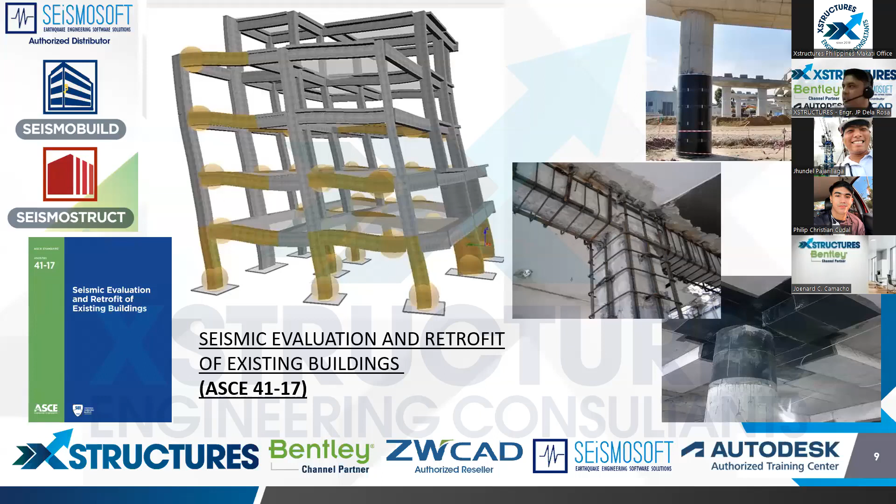So if you need FRP, concrete jacketing, and steel jacketing of elements, you can do it with the program.

When it comes to software solutions, for any industry - buildings, bridges, geotechnical, or rail, power plants, project management - Bentley has all solutions for those different industries. But for us, we are focusing more on structural, roads, bridges, and geotechnical.

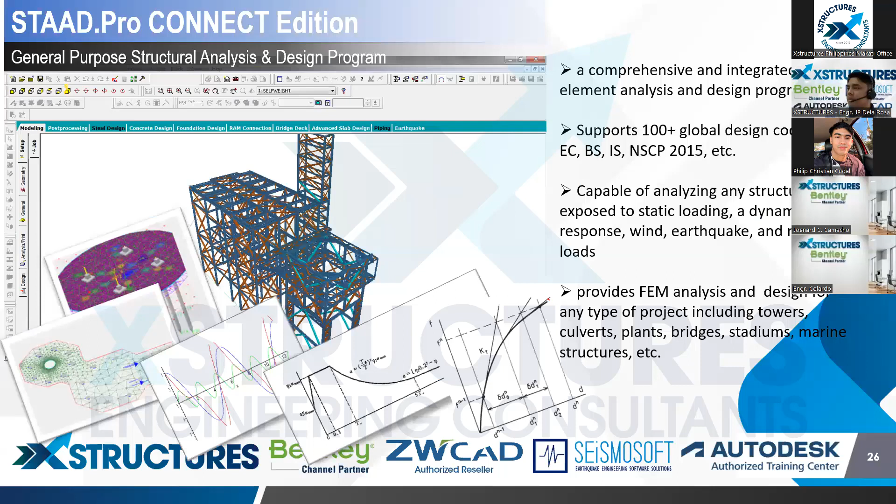So here are some of the projects I compiled that were designed using Staad Pro. Most of these structures are monumental structures abroad. Because I worked in Dubai, UAE for so many years, here are some of the monumental structures there designed using Staad Pro.

The Abu Dhabi airport, in Abu Dhabi, UAE. So Staad Pro is not just for simple residential structures, it can handle monumental structures, like the Abu Dhabi airport, like the Nakheel Mall in Palm Island, Dubai, and then the Mohamed Bin Rashid Library in Dubai, UAE. So there's so many analyses done there, in-place analysis, construction stage analysis, using Staad Pro to analyze this structure.

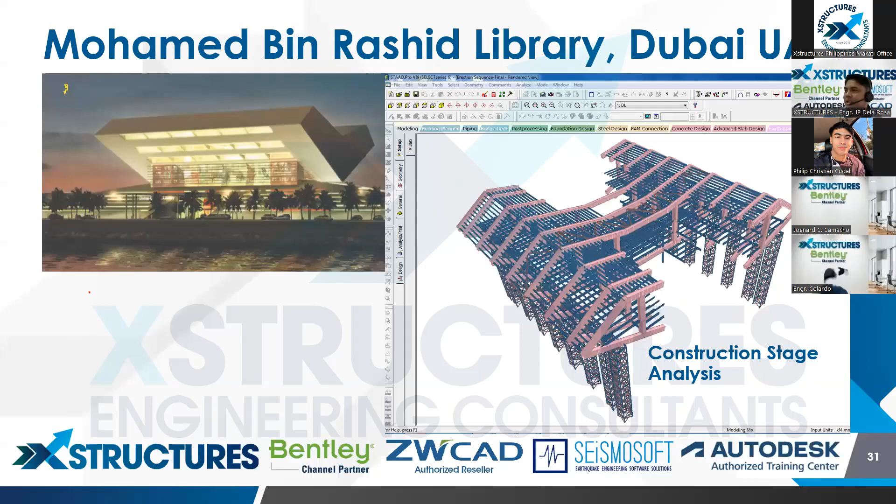As you can see the shape, it's quite unique. Even the Dubai Canal pedestrian bridge, it's twisted, a pedestrian bridge with art. And the Ferrari World Abu Dhabi, combined plate and beam elements, built in Staad Pro and analyzed and designed, of course.

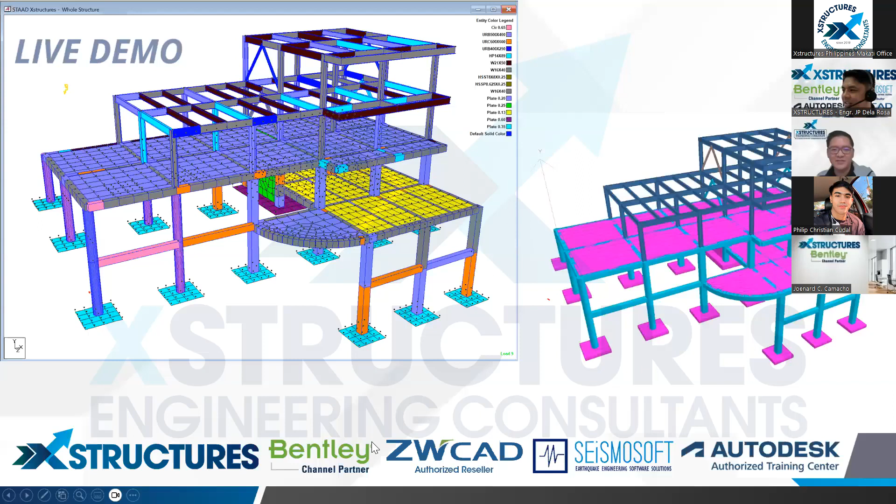Maybe still setting up. Yes sir, hello, good afternoon everyone. Okay. Yes, hello sir. Okay. Sir Paulo is currently in Manila. I'm here in Davao. Okay, because of travel duties. Okay.

I heard Sir JP introduced earlier the software Seismobuild and SeismoStruct, and he told us that currently it's one of the few software in the market to cater to retrofitting design. And this topic this afternoon is very important, because when you do retrofitting design, you need to be knowledgeable about response spectra. And we're going to discuss that.

Okay, so let me now share my screen here. I grabbed our template from Xstructures. Since I'm also currently an assistant professor at TUP Manila, I teach full time in undergraduate, and I also teach in masters. If you ever wanted to enroll at TUP, and even at Xstructures, I'm a resource speaker for some short courses like earthquake engineering, matrix analysis.

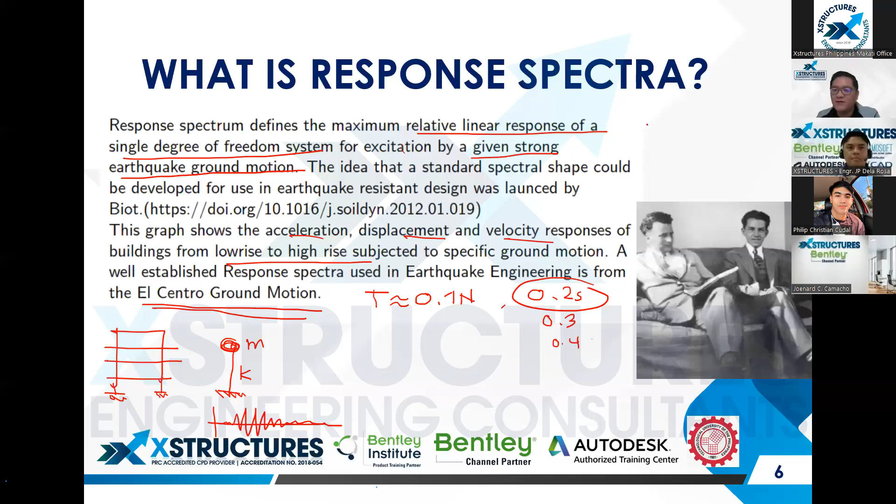Now when it's 0.3, that's a 3-story building. 0.4 is 4-story. 0.5 is 5-story. I believe the designers here, when you have a project and subject it to STAAD or ETABS, you'll see roughly that's how the period comes out. Even if you use the approximate formula from NSCP, CT times H raised to 3/4, you'll get roughly the same period. So when we say 0.5, that's 5-story, and for 10-story, roughly 1 second.

So that means you will subject that ground motion to a lot of SDOFs, from 1-story, 2-story, 3-story, going upward. And then we get the peak responses, as mentioned earlier in the definition.

Okay, so that's for the response spectra from a specific ground motion. When we talk about the code, the code already provides a response spectra, and this is what we will use for design. But before we go into that, let's cover the theory first - we want to create the response spectra from a specific ground motion.

So what's the ground motion? The ground motion representation shall, as a minimum, be one having a 10% probability of being exceeded in 50 years. This is code-based - this is what NSCP states.

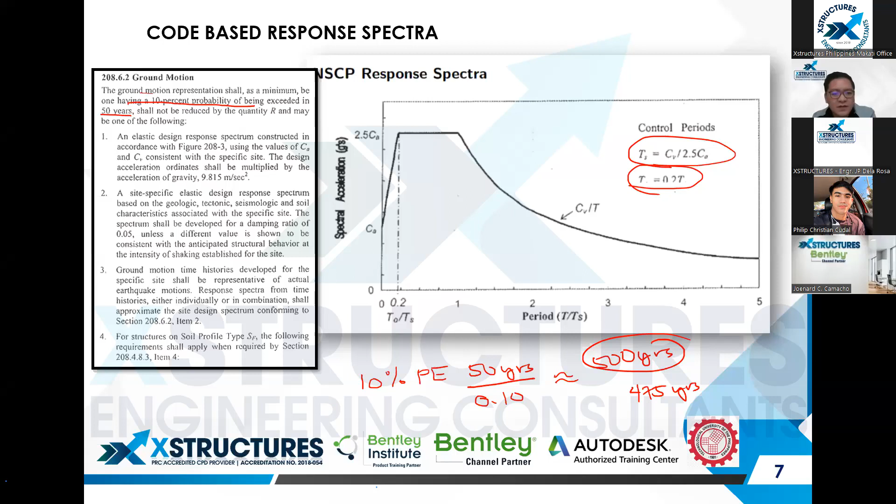So this is a very quick application of it. Once you've generated it, I'll show you a spreadsheet later on how to generate it quickly. Once you've developed it, you import the coordinates into our STAAD, so that STAAD will use it to determine what spectral acceleration to apply.

By the way, this is our zone map in the Philippines—zone 4, and you'll see roughly 90%. So to give context, once you're in zone 4, the code implicitly requires that your structure should withstand a PGA of 0.4 G.

To give you an idea, what is 0.4 G? The Abra earthquake that happened, as per the record of PHIVOLCS, that was only 0.2 G near Ilocos. Of course, we don't have an official epicenter record yet, but what was detected at the PHIVOLCS location was 0.2 G. But imagine the destruction—yet the code requires 0.4 G from us.

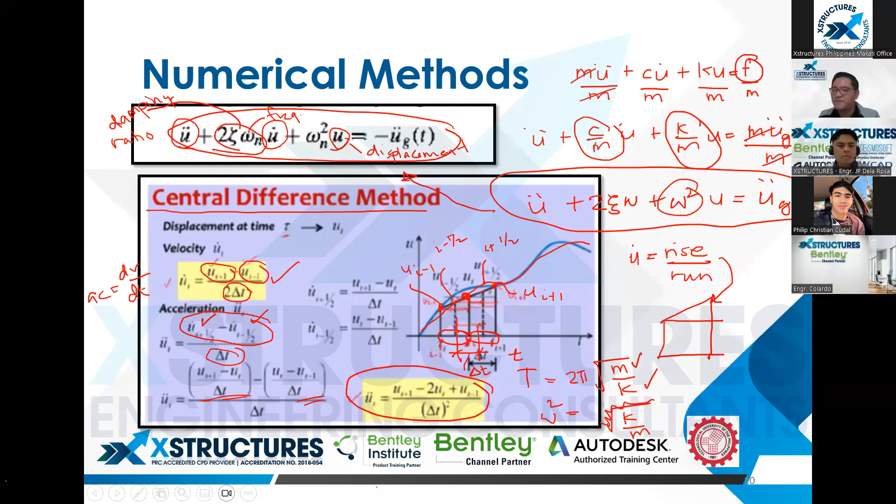Next. So sabi natin, yung formula ng equation of motion is ito: M u double dot plus C u dot plus K u equals force. So nakuha na natin yung formula ng acceleration earlier, diba? So ito yun.

Kuha natin yung formula ng velocity. Plug in natin doon sa formula. Okay, and then algebra lang, find the common terms, until ma-simplify natin into this. And then ito na yung pinaka-algorithm ng central difference method.

I got this from Chopra again. Mukhang madami, no? Pero lagi ko sinasabi sa mga students ko, you will notice itong k hat term, A, B, constants na yan. Constants, because given yung mass. Kasi kapag meron kang SDOF structure, syempre kailangan alam mo yung mass.

Mag-assume tayo ng damping, damping coefficient. Given din yung delta T. Kasi nga, kung meron kang ground motion from PHIVOLCS, normally given na yung time increment, yung records. So ikaw magsiset yan. And also, makikita nyo naman yung formula ng A and B, ganun din, it's a function of M, C, delta T, ganun din yung T. So yung mga yan constant.

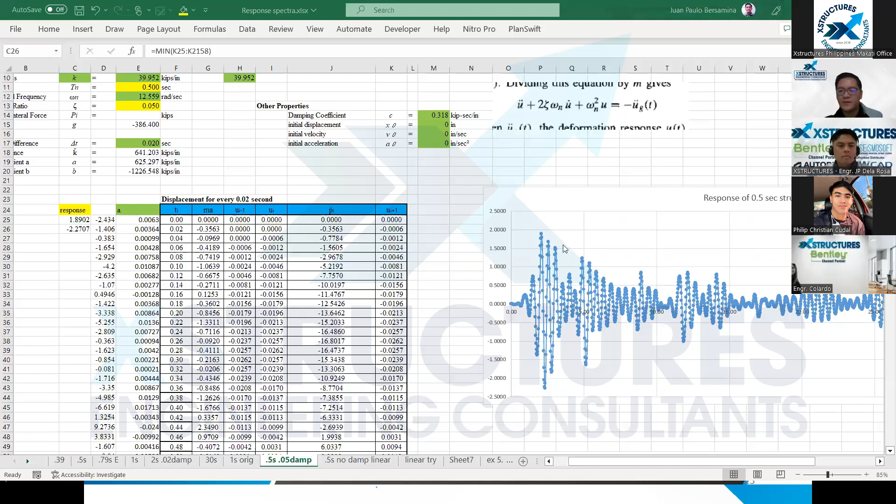Ayan, for example, 5-story. 0.5 seconds period. So if I zoom in here, that's the formula, 2 pi over the frequency.

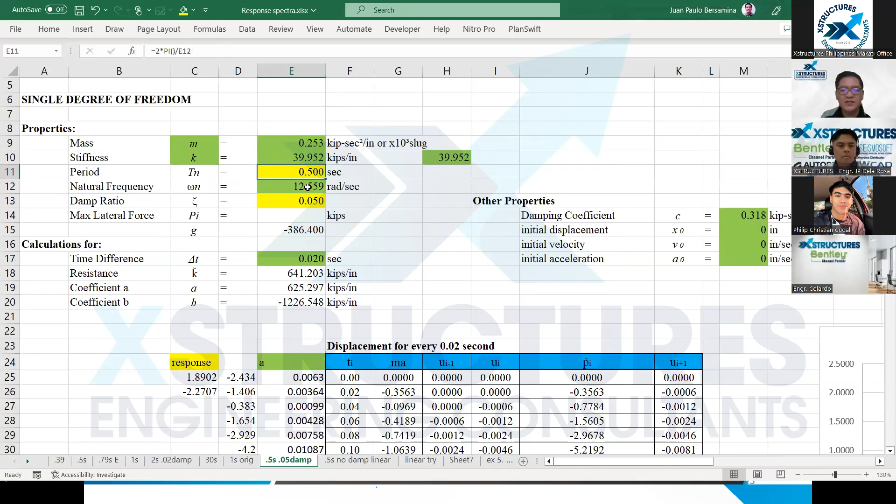Let's say this is your given mass, and this is K, just to get the 0.5 period. This is our El Centro ground motion.

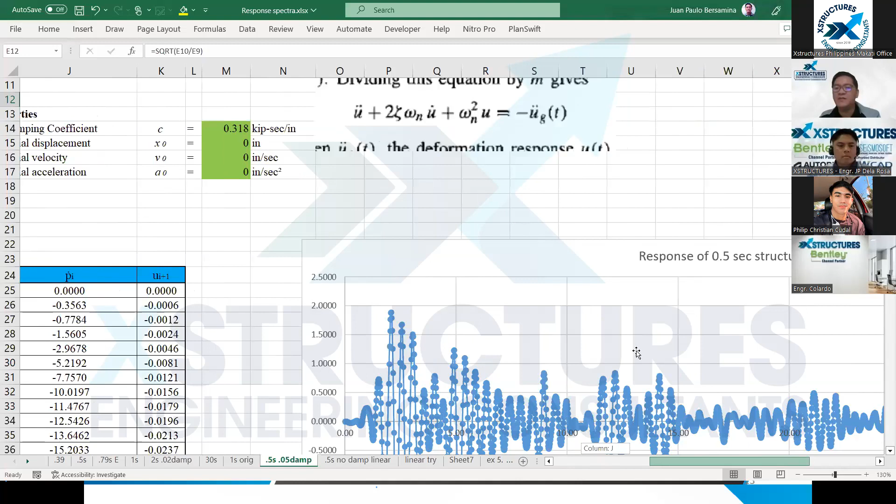We subject it to the El Centro ground motion, and this is its time history response. As you notice, where did the peak response happen? The peak response occurred in the vicinity of 2 seconds, at 1.88 and 2.27 at 2.32 seconds. So it's almost simultaneous with the PGA and the peak response of the 5-story structure with a period of 0.5 seconds.

So let's go back. Sir, we had a hard time with the spreadsheet. You can also do it in Staad. You can do it in Staad also.

For example, you model in this one. We try to model a frame having a period, say 0.5. How do I know that's 0.5? As a basic check.

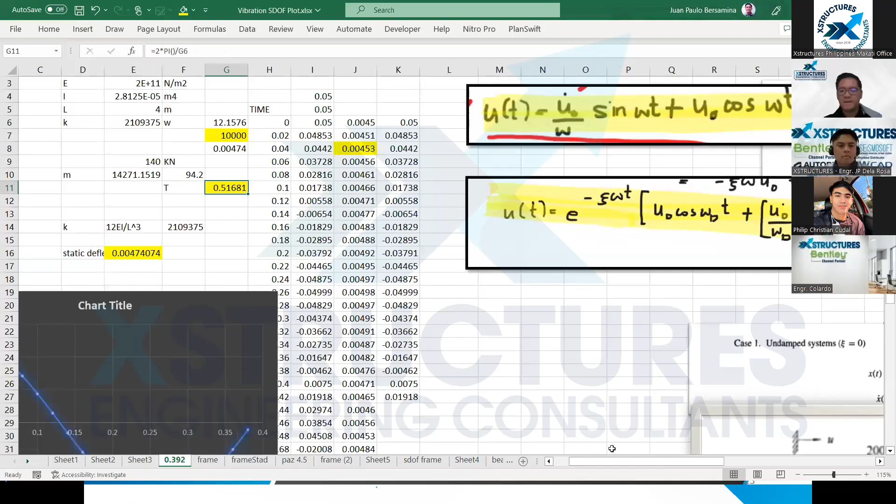Let's say I have a mass, or 140 kilonewton lump mass. Convert it to mass, divide by 9.81, and that's your corresponding mass. Then let's say I have a column that's 150 by 100, for the two posts.

The stiffness of that is 12 EI over L cubed, times 2. So now you have K. You have M, mass, you have K, so you get the frequency. Convert it to period, and this is your corresponding period, which is 0.5. So let's do this in Staad.

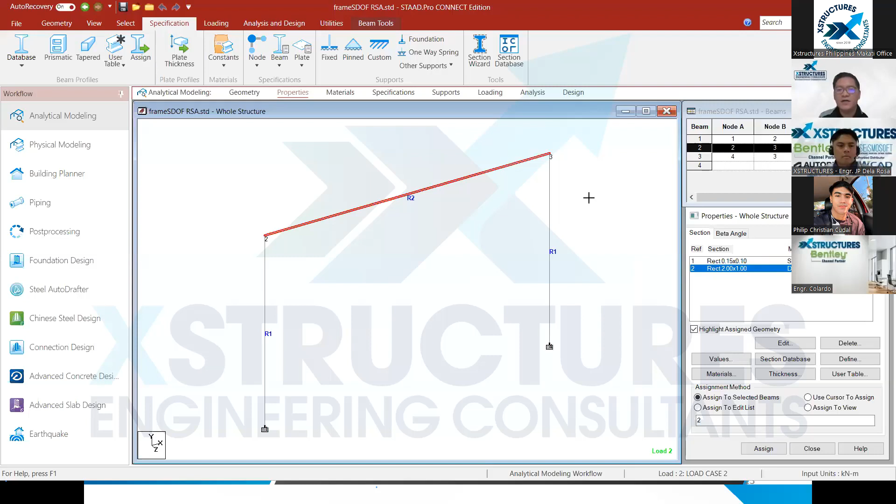Example. Properties, this is our 150 by 100. And then I just put a rigid element to make sure there's no rotation. And then I have a loading. So to have a 140 kilonewton mass, I put 70 on both ends. Then you perform this command, the modal calculation, meaning it computes the period of your model.

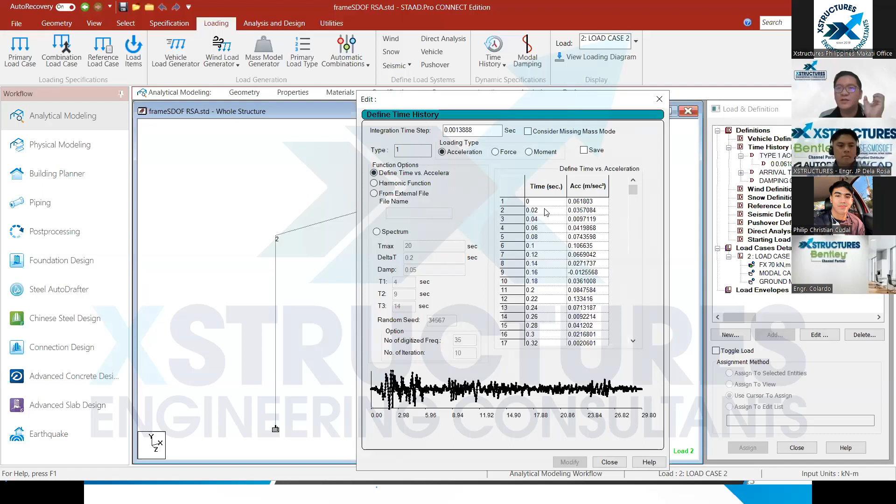So you define time versus acceleration. And what's great about Staad is you can just copy paste from Excel the earthquake data. So I subjected El Centro ground motion to a frame having a period of 0.5 seconds.

Okay, so let's run it. Analysis, run analysis. There, done. Then let's go to post-processing. Dynamics, you see?

The computed period is roughly 0.5, 0.52 seconds, the same. Then if you want to find the time history response...

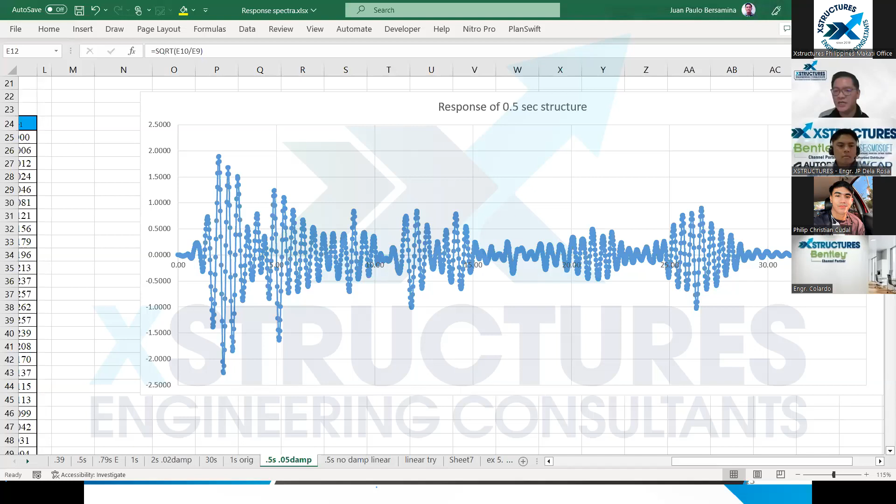Another way to quickly obtain the time history response is we can use the software SeismoSignal. Fortunately for me, as provided by Sir JP of Xstructures, I also have SeismoSignal on my machine. So for example, like we have this, I already set up the El Centro ground motion here.

This is its response spectra. It already has that, but let me just show the time history response. So you can set the damping ratio, you can set the period for whichever you want to find the time history response, and then get the response, which is displacement.

So there, you see, same response, where the peak is roughly at 2 seconds. So let's go back to this. That's the quick procedure using SeismoSignal.

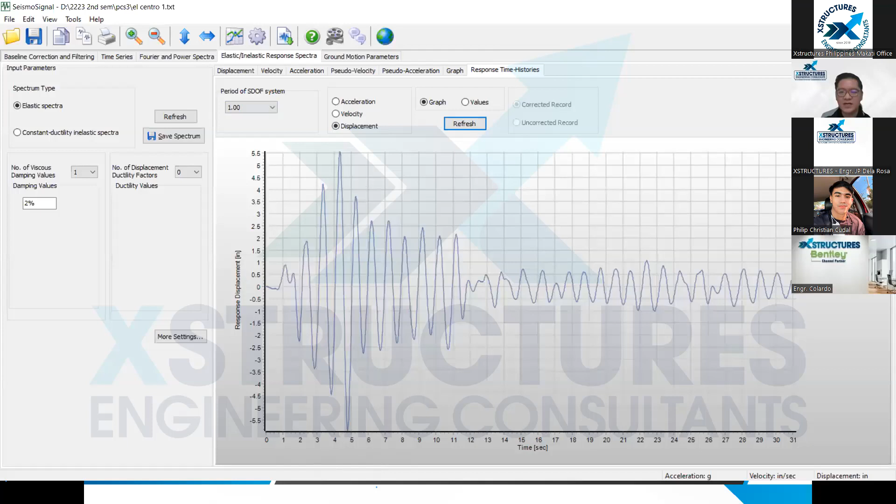How about sa 1 second or 10-story? Balik tayo sa SeismoSignal. Palitan ko ito ng 1 second. Refresh. Ito yung kanyang peak response, that's roughly 5 point, this is 5.5, almost 6, 6 inch. Ano yung nakuha dito sa ating slide? 6 inch. Okay, so the same.

And then for 2 seconds, that's about 20-story, no? 7.47 inch. Balik tayo sa SeismoSignal. 2 story, 2 seconds, 20-story rather. 2 seconds, then refresh, yan naman yung kanyang peak response. Makita nyo, ano niya, that's about 7 inch, ito 7.5. So halos the same. 7.47 inch. Okay, so yun.

You can use Staad, you can use numerical methods in the spreadsheet, and you can use SeismoSignal. And mapaplot nyo na yung displacement response spectra. Mapapansin nyo roughly yung trend pataas. Habang tumataas yung building, tumataas din yung displacement.

And then, to get the velocity and acceleration response spectra, ang gagawin nyo lang naman, di ba, ito nga yung displacement natin. Ang formula lang naman doon is V is equal to omega D, multiply mo lang yung displacement sa frequency. And then to get the acceleration, omega square D. Okay, and yun nga, when you do that, ito yung lalabas na acceleration response spectra.

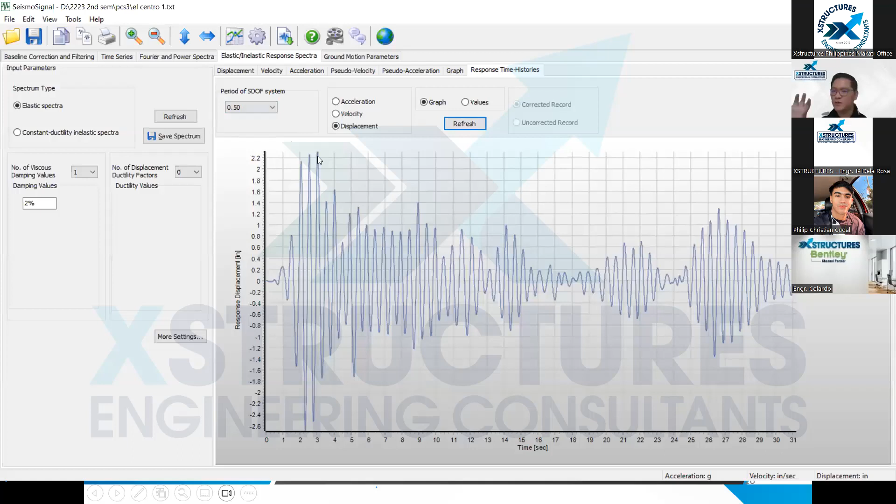Yung 1 second, sinin niyo, refresh, saan yan? At about almost 5 seconds.

Okay, then yung 2 seconds, so yung 20-story, refresh, lumayo, no? So roughly 11 or 12 seconds. Okay, so ano yung sabihin nun? Balik tayo dito, so ibig sabihin, habang yung structure natin tumataas yung period, nagkakaroon ng lag from the PGA up to dun sa peak displacement niya. So itong 5-story building natin halos sumasabay dun sa PGA ng ating El Centro ground motion. Tapos yung 20-story building, na-experience niya yung peak displacement 10 seconds pa, about 8 seconds after nung PGA.

So that's one of the reasons to discuss this response spectra. Mapapansin nyo yung mga low period structure natin, let's say ito 0.5, tingnan nyo yung acceleration niya, umabot ng 1.1 G. Imagine nyo gaano kataas yun, 1.1 G. Okay, while yung 20-story building, 0.2 G lang. You can imagine, no? Yan. So ibig sabihin yung mga low-rise building, ang tendency, makaka-experience sila ng peak acceleration. Tapos yung mga high-rise building, ito, low acceleration siya.

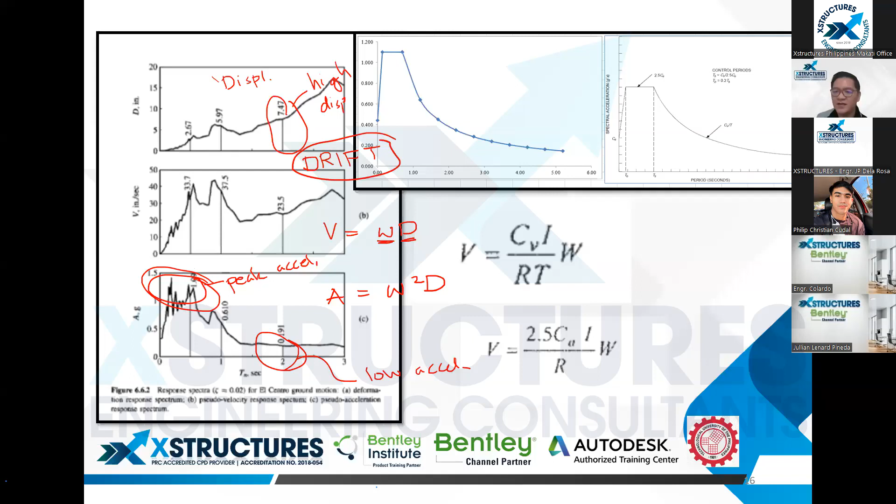Okay, and when you look at the displacement response spectra, of course, yung mga high-rise building, or mid-rise to high-rise, syempre, high displacement. So parang, can imagine, ang bagal sa taas, pero ang laki ng displacement. That's why, yung mga mid-rise to high-rise natin, ang tendency, babantayan mo sila yung design sa drift, kasi nga ang laki ng displacement. Okay, while yung mga low-rise building, ang laki nung kanilang peak acceleration. Halos sumasabay sila dun sa high frequency ground motion, yung mismong PGA, okay?

And that's why meron ditong picture also ng ating code-based response spectra. Kita niyo, no? Ito yung basically, if you smoothen this response spectra, ganyan siya, kagaya ng response spectra natin, ng code-based response spectra natin. Okay, and then...

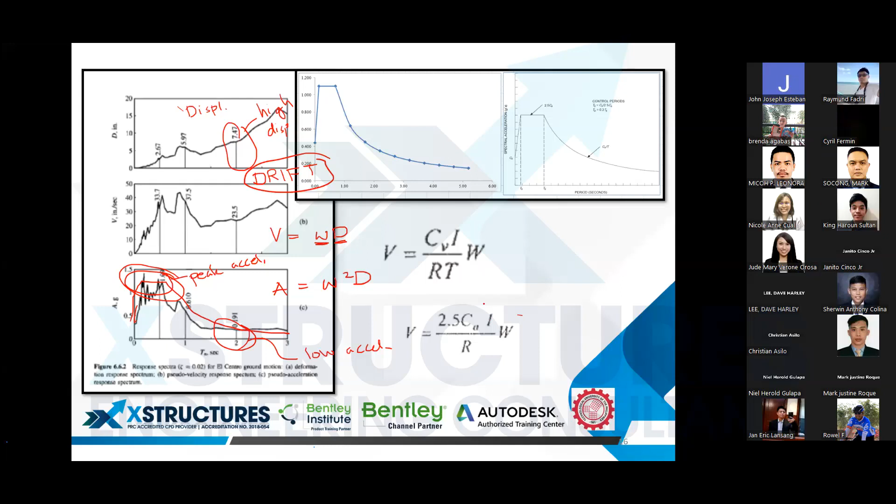So another rule of thumb, another approximation, that's why when you're designing a low-rise building, most likely that the governing base shear formula is this. This is your Vmax, kasi makita nyo sa formula, this is yung peak. Kasi yung mga low-rise building have a tendency na mag-resonate dun sa high frequency vibration. Okay, then yung mga high-rise building, ang tendency, dito sila mag-govern. So, itong area na to for low-rise building, while this one for mid-rise to high-rise. So papansin niyo, pag 2-story, 3-story, madalas ito mag-govern.

Okay, so this is a, ayun nga, a sample code-based response spectra. So input nyo lang kung anong zone ka, ano yung distance mo from the fault line, ano yung soil type ng site mo, and then mag-generate yung Na and Nv, and so the Ca, Cv, so makakakuha ka na ng response spectra like this. Okay, and what do you notice? Tingnan nyo yung coordinates ng response spectra na to.

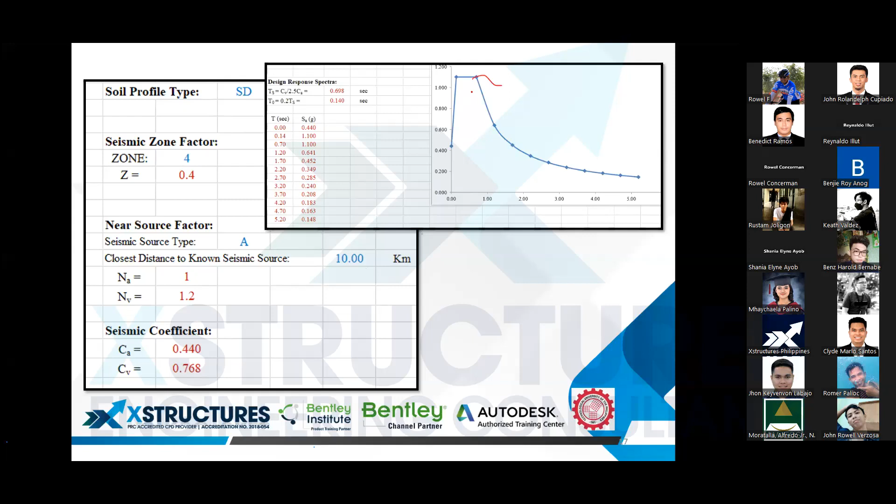And this is also about 1.1 G. Okay? Diba, halos the same nung ginawa natin sa El Centro. Kasi yung El Centro, 0.3 G na eh, halos 0.4 na rin yun. Eh, no? And by the way, I'll show you ito. Yeah, so SeismoSignal.

Saan ba yan... acceleration. So ngayon, graph. Ito to. Period versus acceleration. Ayan na lang. Halos, yan. Ganyan na. 1.1.

Ito yung maganda sa software na to. Automatic, mag-import ka lang ng ground motion, automatic mag-generate na niya yung response. Pero syempre, sa mga students ko sa masters, pinapagawan ko sila ng spreadsheet para alam natin ano yung algorithm ng mga software na to.

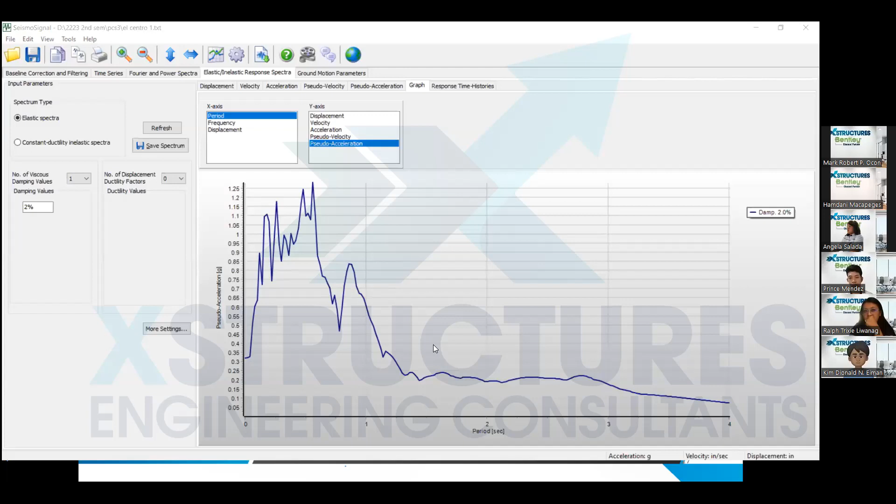Okay, so it's your response spectra. And that's 1.1G. That's too large. Ang ginagawa natin sa code is balikan natin itong formula na to. So makikita nyo, this is 2.5 CA.

1.1G. Now remember, your V is, let's say stick tayo dun sa 2.5 CA W over R. Yan, so this 2.5 CA, ito siya. Okay, but syempre yung gagamitin natin sa design is less than that. And nangyari yon because nag-incorporate tayo ng R value.

If you convert that, roughly hanggang dito lang yan. Sabi natin hanggang dito na siguro. Ibig sabihin, yung magnitude na to, yung reduction na yan is due to the R value. Doon papasok yung R equals 8.5 for SMRF under zone 4.

Yeah, so another reason bakit kailangan natin maging knowledgeable sa response spectrum or the spectral acceleration na tinatawag is because nag-release na, for example, si PHIVOLCS ng SAMPH, or the Spectral Acceleration Map of the Philippines. And this, if you now know how to generate a response spectra by use of numerical methods, or SeismoSignal,

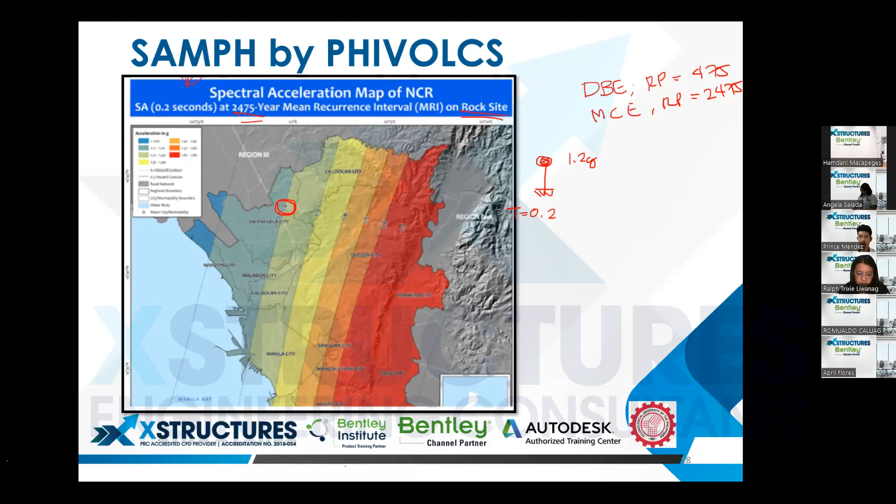Well, it's not official yet, but once na may ganito kang data, spectral acceleration mo, pwede ka nang mag-employ ng IBC format na base shear. Okay, so you also need the spectral acceleration ng 1 second. Naalala nyo kanina, sa 0.5 seconds or 5-story, ano yung spectral acceleration sa El Centro?

1.1G. Yeah? So ito naman, 1 second. Ano yung spectral acceleration? Sa MCE level, Valenzuela, roughly 0.5. Sabihin, 10-story, siyempre mas mababa na yung kanyang spectral acceleration kasi mas flexible na siya. Okay, so 0.5G na lang siya. And that's why meron akong snippet dito ng IBC format, kasi in case lang naman na we transition to IBC, yun yung input natin. I-input niyan yung 1.2, saka yun nga, yung 0.5G na spectral acceleration.

Yan, and then pag na-input mo na yun, SS, yun nga, 1.2, tapos S1 na 0.5. Next na kukunin mo is yung FA at FV. So kung nasa soil type D ka, or site class D, your FA is 1 and FV is 1.5. Okay, well pakita ko lang saglit.

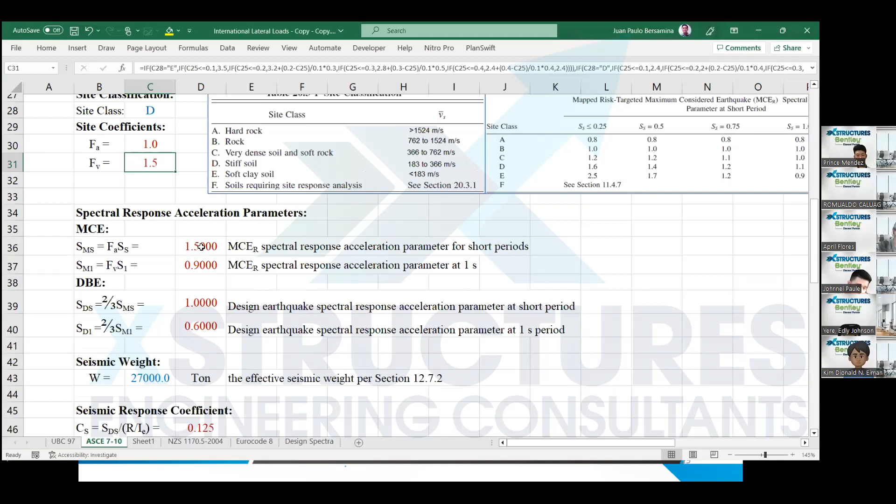Okay, and ito na yung result. Yan, so you will see na amplify siya, naging 1.5 and 0.9. Ulitin ko, 1.2, 0.5 for example, amplify siya, 1.22, and then yung 0.5 naging 0.75G.

Okay, now however, MCE level yan. Di ba nga, sabi natin kanina, yung return period na ide-design natin, about 500 years. Eh yung pre-provide ng SAM-PH, 2500. So, convert natin yon into DBE level. Ito na siya.

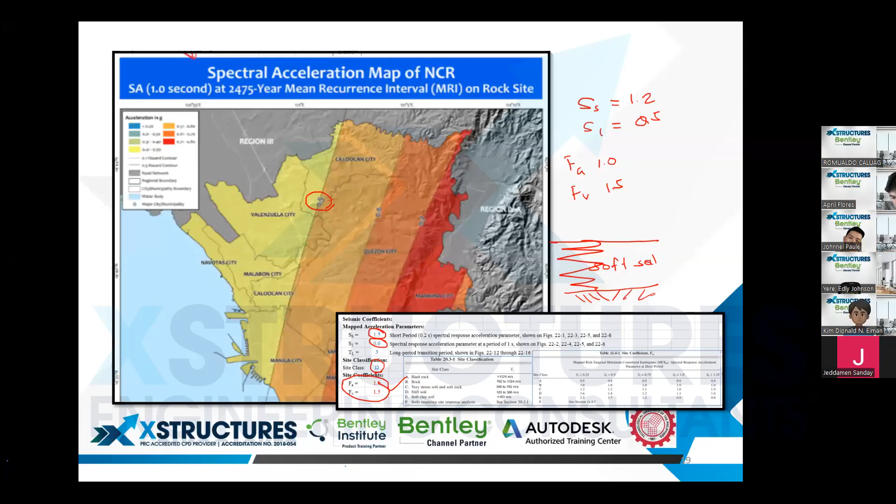So, it became 0.81, 0.5, using this formula. It's only 2/3, the multiplier is just 2/3. So that's it, basically that's what we'll take. That's the use of spectral acceleration in the IBC format. You need to be aware of the spectral acceleration, okay?

So next, let's go into detail on response spectrum analysis. What's the meaning of response spectrum? The ground motion representation should be in accordance with Section 208.5.

And it's mentioned here, the number of modes. Usually when we do response spectrum, it's multi-degree of freedom, right? Not single degree of freedom buildings. So what does it say about the number of modes? It may be satisfied by demonstrating that the modes considered account for at least 90% of the participating mass of the structure. This means we need to get the modal period, the modal mass, and the participating factor.

Okay, so let's just go through the mathematics. As a demonstration, let's say we have a 5-story building here, just a plain frame model, just to show.

From the equation of motion, MU double dot plus KU equals 0. So this is a free vibration MDOF equation. We can convert this formula into K minus omega squared M. This is an eigenvalue problem.

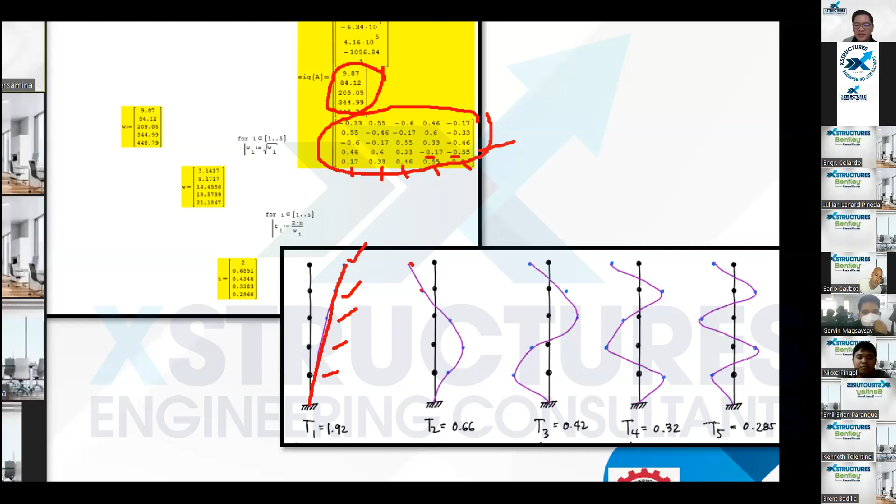For mode 2, this is the eigenvector: negative 0.55, negative on the left side; negative 0.17 still on the left side; 0.33 on the right side; 0.6 on the right side; 0.46 on the right side, and connect the dots, that's your mode 2.

And then mode 3: negative 0.46, positive 0.33, 0.55, negative 0.17, negative 0.6. Connect the dots, that's your mode 3. And the corresponding periods are: 2 seconds, 0.68, 0.43, 0.32, 0.285.

So like I showed earlier with the single story frame, for the loading you will put masses. For example, 444 kilonewtons per floor for your mass. Then you excite it in the x direction, since our vibration is lateral, in the x direction.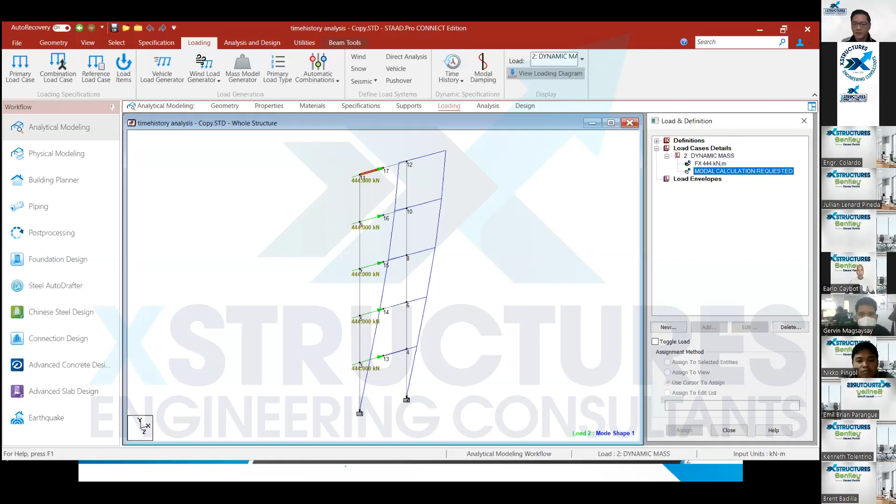Then you use this command, modal calculation, and then run it. And then when you run it, post-processing, dynamics, and this is the corresponding period. You have mode 1, 2 seconds.

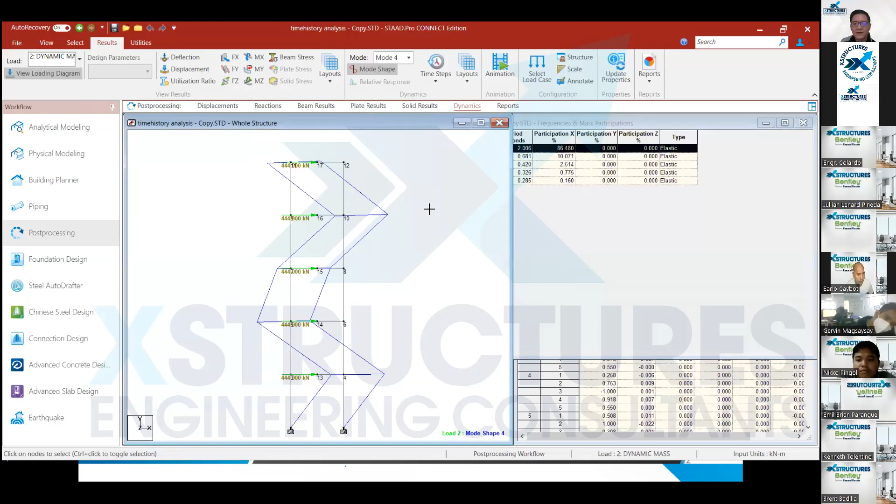2 seconds, this is the shape of mode 1. And mode 2 results, so mode 2, like that. And this is mode 3, mode 3, and then mode 4, and mode 5.

Next, just this. So let's say we already know the mode and mode shape. Generally, when the stiffness is given and the mass is given, when you know the mass and stiffness of your building, you can get the frequency and the corresponding mode shape.

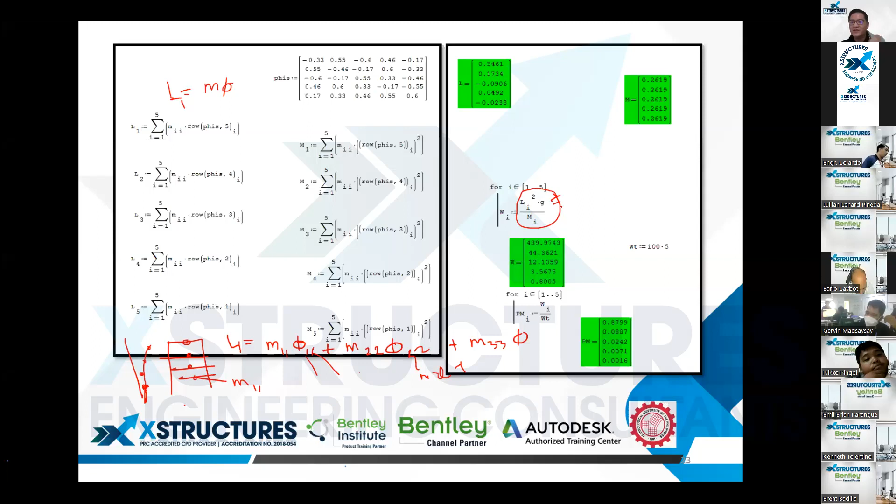Pag nakuha mo na yung L and M, next is you need to find the modal weight. Ito naman yung formula. Kita nyo, L square over M. Itong G naman, constant yan. English units, 386.4. Kung SI ka, 9.81. So yan, makukuha mo na yung modal weight.

Basically, divide mo lang the modal weight by the total weight. Kaya papansin nyo, ibig sabihin, si mode 1, 440 kips yung na-occupy niya. Eh, yung total weight natin is 500 kips. So, 440 divided by 500, you will get 88%.

Si mode 2, na-occupy niya is 44 kips, and then divide by the total weight, 500, so that's roughly 9%. So this shows that si mode 1 has the most significant contribution. Yung mass participation niya is 88%.

Ito yung concept sa static analysis. Yung mga low-rise building natin, nakita nyo yung definition kanina, inaalaw ang static analysis because the mode 1 generally prevails, is dominant for low-rise building. Yeah, ibang storya na pag high-rise na. Habang tumataas yan, itong higher modes, shoot up na yung value niyan. Kasi nga, nagiging flexible na yung structure mo.

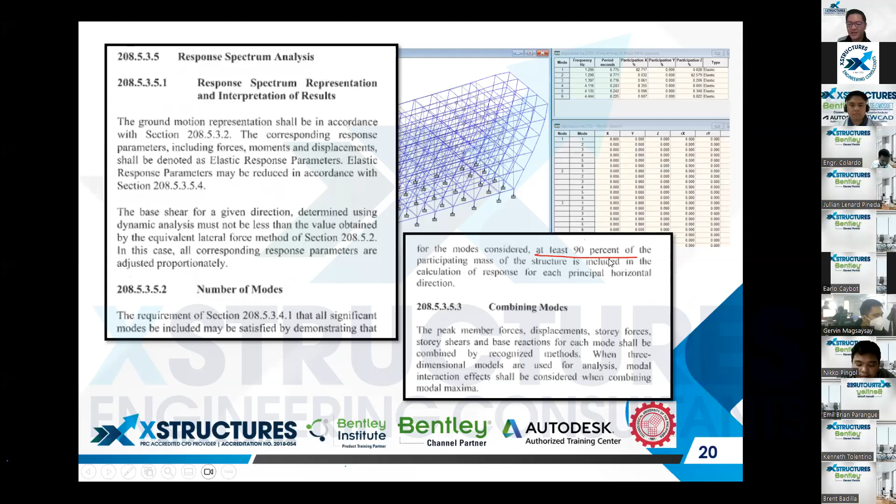Simple lang yan, no, ng mass participation. So yan yung computation sa lecture. Okay, so yun yung modal, multi-degree of freedom. But...

I'd like to discuss shortly modal orthogonality. Let me have a 10 seconds break lang po.

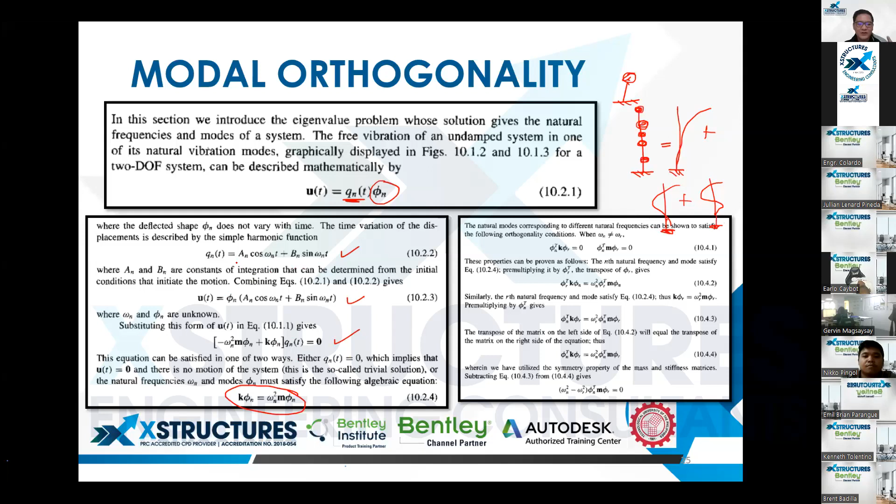Ito yung flow ng formula for this. Diba, sa differential equation, you assume a solution like this, tapos i-substitute mo sa equation of motion, and when you substitute that, ito yung lalabas. Kita niyo ba?

I-zoom in ko. Yan, ito yung lalabas, no? But remember, this is your Q sub n. It should not be 0, kasi nga yan yung assumed solution mo. Therefore, this term here is 0. Kaya inequate natin siya into this. Okay?

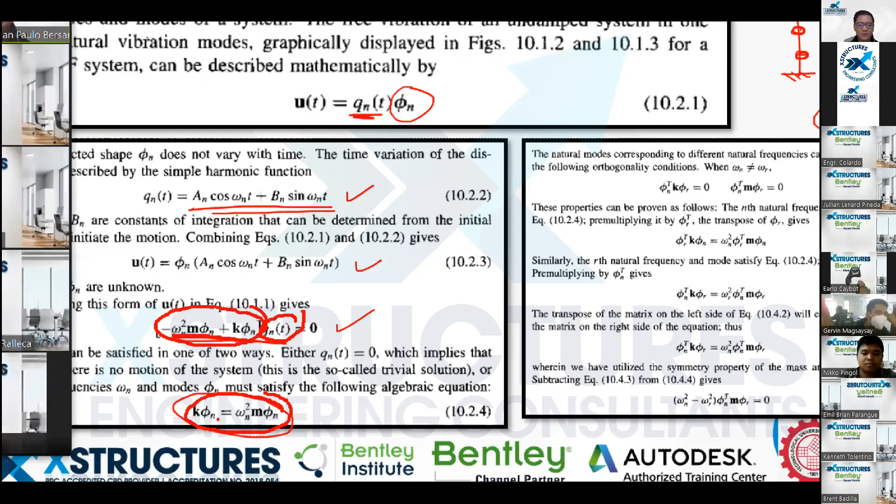So K phi n is equal to omega square M phi n. Okay, so sabi dito, i-multiply natin both sides by phi transpose. Yan, phi r transpose, lagyan ng yan, okay? And then also the other phi n transpose naman. So it turns out that...

In transpose, sabi dito, transpose matrix on the left side will equal the transpose of the matrix on the right side of the equation. Tapos pag sinubstitute natin siya, papansin nyo, equal to, di ba? Phi n transpose M phi r. So nag-appear siya, right? So substitute natin, naging ganito.

So what does it mean? It means, either omega n square minus omega r square is equal to 0, or phi n transpose m phi r is equal to 0. So isa lang doon pwede mag-0.

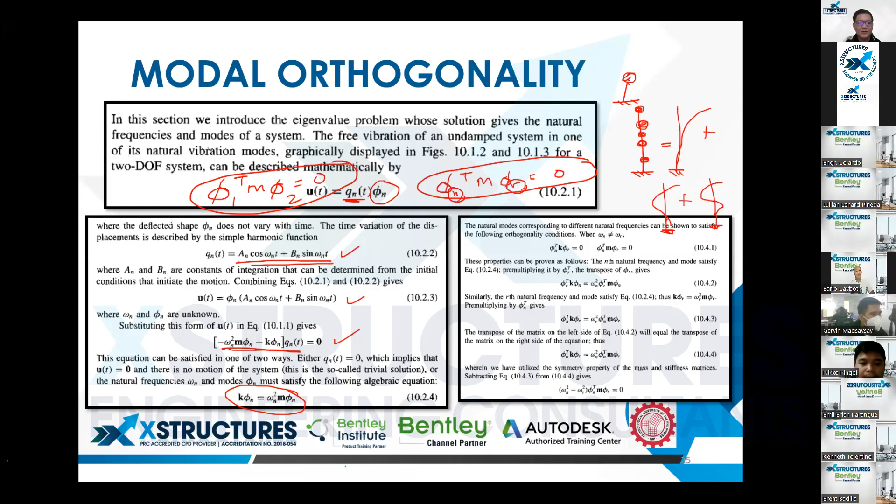Okay, kailangan magkapareha sila. Phi 1 transpose, m phi 1 may value. Otherwise, magsi-0 yun. Yan yung modal orthogonality. So kung i-apply natin yan sa equation of motion, mu double dot plus cu, lagi tayong bumabalik sa equation of motion.

Plus ku equals force, substitute natin yung displacement formula, phi q. M phi q double dot, kasi remember, this is u double dot, u dot, and this is u, phi q. And then, lagyan natin ng phi transpose both sides. Magkakaroon tayo nito.

Okay, next. Now knowing that, di ba, phi, balikan natin, ha? Phi transpose m phi, sulat ko, di ba? Phi transpose m phi. Knowing that hindi po pwedeng mag-combine yung magkaibang subscript, tapos with phi 1 transpose M phi 1. When you do that, magiging diagonal matrix to.

Ibig sabihin, when you operate this, magiging ganyan, diagonal matrix. So ganoon din sa damping, and then sa stiffness. Pag then expand mo yan, you will get this. Mapapansin nyo, lahat sila naka-1. So ganun din sa M22, C22. So this is now what we call an uncoupled equation.

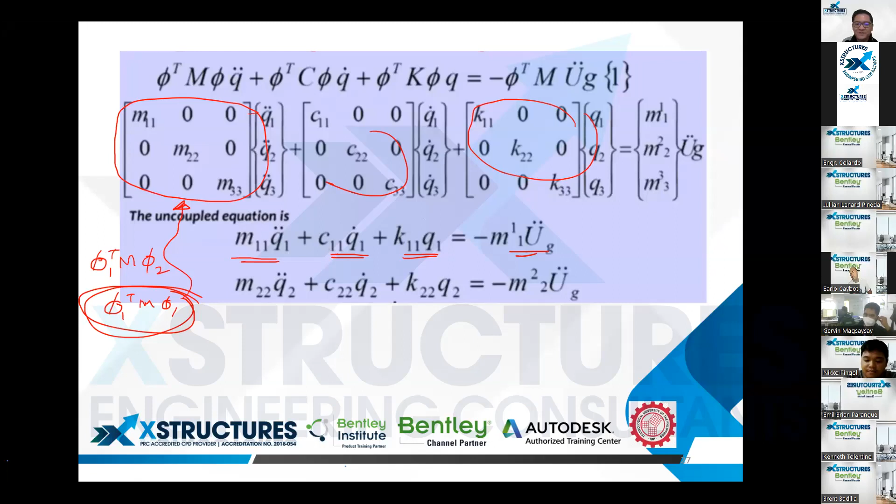And so divide the equation by mass, you get this. So parang nakikita nyo, similar dun sa equation natin kanina, u double dot plus 2 zeta omega, u dot plus omega square u. Same nung equation natin kanina. Kasi nga, naka-Q lang because this is per mode - response per mode, equation per mode.

Okay, and then you will see, simplifying, you will see you have a term this. Ito nga yung tinatawag nating mass participation factor or the modal participation factor, which is yun yung ginawa natin kanina, yung kinuha natin kanina.

Okay, so mag-response spectra analysis na tayo, for displacement lang ha, for displacement lang. Kasi yung 3D, kay Sir JP yun. So, application lang for displacement.

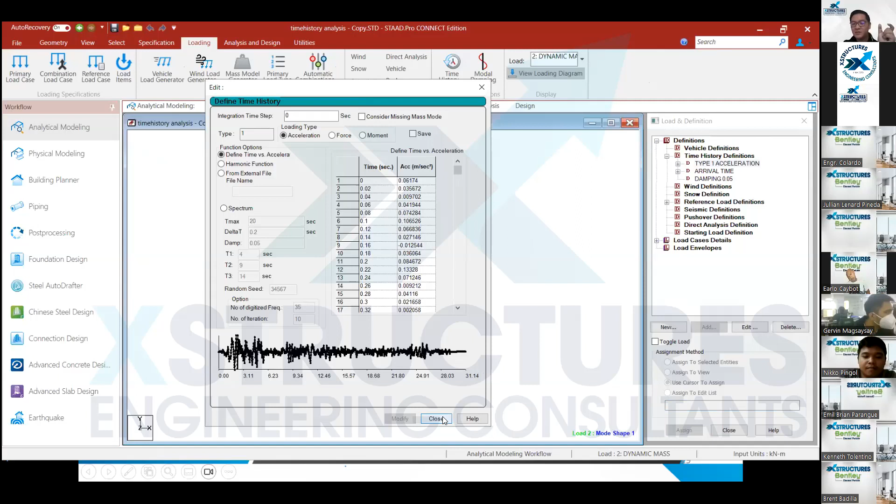So i-subject ko ngayon itong aking 5-story building sa El Centro ground motion. Subject ko siya. So again, punta kayo sa loading. Yung ano, ito yung acceleration, ito yung earthquake, ground motion. Kanina, yung single frame lang yung sinubject ko sa El Centro. Ngayon, 5-story frame, isasubject natin sa El Centro. Then let's compare the response.

Ayan, so I think na-analyze ko na to. Post-processing, punta ako sa displacement. Ay bakit, di pa yata na-analyze pala. Loading, analysis, run analysis. Okay, apply sa post-processing. This layout. Bakit wala yung displacement? Open here. Teka.

Wait lang, lalagay ko muna yung time history natin. So, add time history, ground motion, direction of course X, arrival time, yung acceleration na-detect niya kasi naglagay ako ng El Centro ground motion, and then add, yes, close. Nalagay ko na siya, and then analyze. Analysis, run analysis.

Okay, done. Post-processing, tayo sa displacements. So balikan natin yung concept natin kanina, no?

Ang mode 1 natin ngayon, 2 seconds. Sabi ko nga sa approximation, 20 story. Pero ito, it turns out 2 seconds mode 1 natin. Ano yung peak response sa mode 1 kanina? Balikan natin.

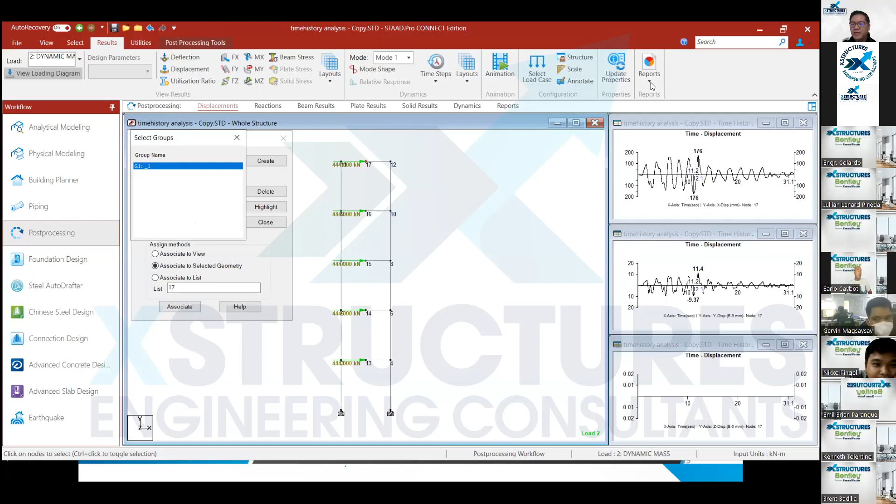Associate, kasi naghihingi si Staad ng group name. Ayan, so yan na yung peak response or time history response. Ito na yung time history analysis ng ating 5-story. Yung kanyang peak response is 176 mm.

176, that's about 6 or 7 inches, no? 7 inch. Kung babalikan natin yung ating...

2 seconds, mode 1, no? Mode 1 has a peak response of 5.38 inch. Ito na yung tripartite curve, no? Kumbaga pinagsama-sama yung displacement, acceleration, saka velocity response spectra.

Okay? So ito yung kinaganda ng response spectra, no? Mabilisang analysis, kasi 'di ba yung naka-umbrella sa dynamic analysis, response spectra saka time history. Siyempre, nung na-develop yung code, hindi naman matataas yung specs ng mga computers noon. The engineers should devise a way ng mabilisang procedure to estimate.

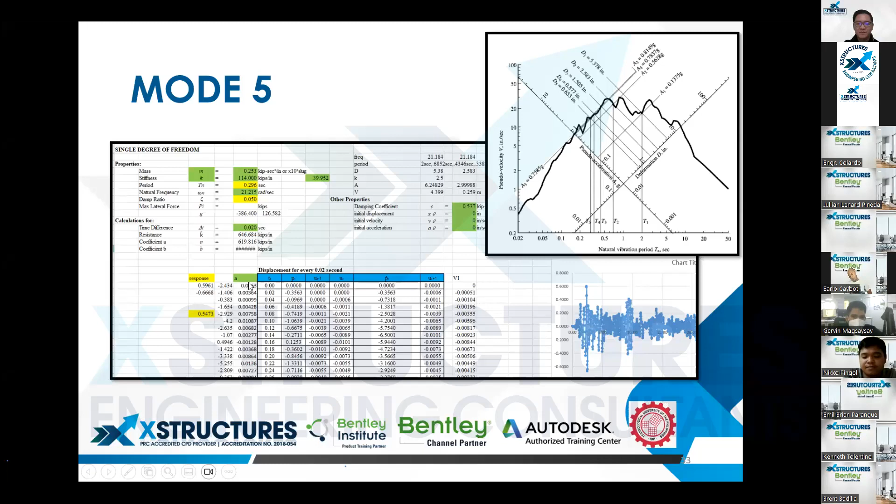So each mode, kumbaga nag-SDOF analysis tayo. Kung kinuha natin yung modal period, tapos kinapture natin yung peak responses: 5.3, 2.5, 1.5. Ilalatag natin siya dyan.

Kanina, we use this formula. Ngayon, dahil na-involve na sa equation yung participating factor, ito na siya, gamma. And then phi, etong D na yan, yan yung basically the response of the SDOF. So ito yung gamma natin using this formula. Then ito naman yung ating D. Ito yung gamma, so the phi vector, ito.

Meron kang gamma, meron kang phi, meron kang D from the SDOF responses, makukuha mo na yung corresponding displacement. So next page, ito na siya. Si mode 2, ito na yung response ni mode 3, ni mode 4, ni mode 5.

And then, using SRSS, yan, di ba? Sum, the square root of the sum of the square. Square root of the sum of the square.

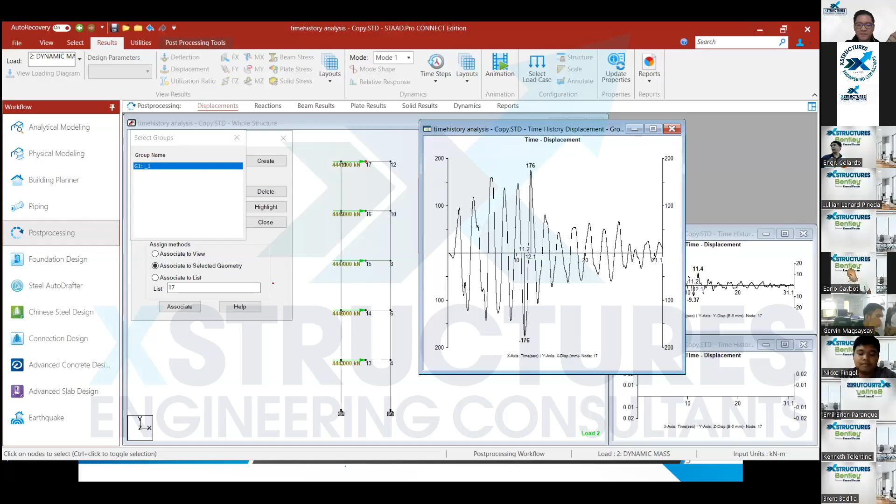So 176... 6.93 inch, okay, versus sa 6.85. Kita nyo, no, medyo dikit, no?

Actually ito na yung table of comparison ng Chopra, no. Using RHA, yung time history na ginawa natin, 6.85; using SRSS, 6.8. Okay, so that's it. That's the comparison of a time history analysis versus a response spectra analysis for determining displacements. Okay, so last, quick ko lang, no, because Sir JP will do the actual demo.

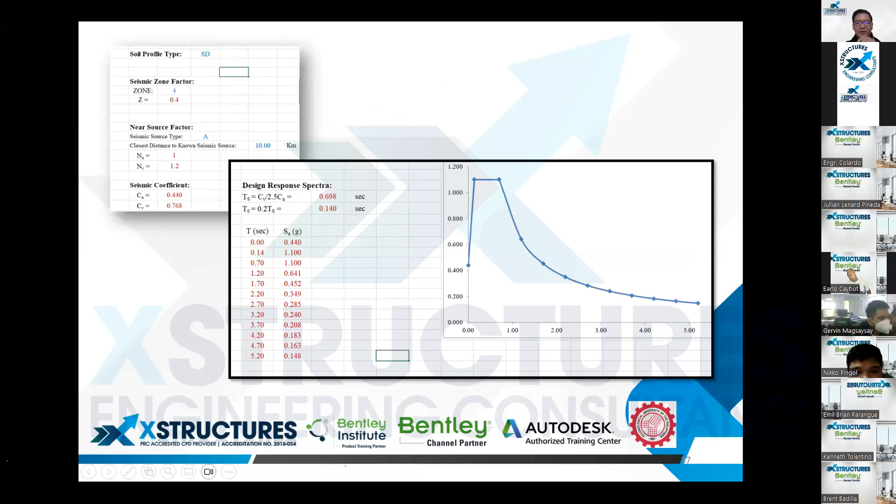So let's say may 3-story ka. Sabi ko nga, kukunin mo lang yung code-based response spectra, code-based na to. Kanina, actual earthquake ground motion ang ginamit ko. Ito, then import mo sa Staad, and then you get the, syempre, you apply in both direction, X and Z.

Prepare the masses acting in the X and Z direction, then add an additional load case for X and Z. I just want to emphasize this because it's always a common question — this is the instruction in Staad.

You need to combine the masses. This is the mass for X, and this is the mass for Z.

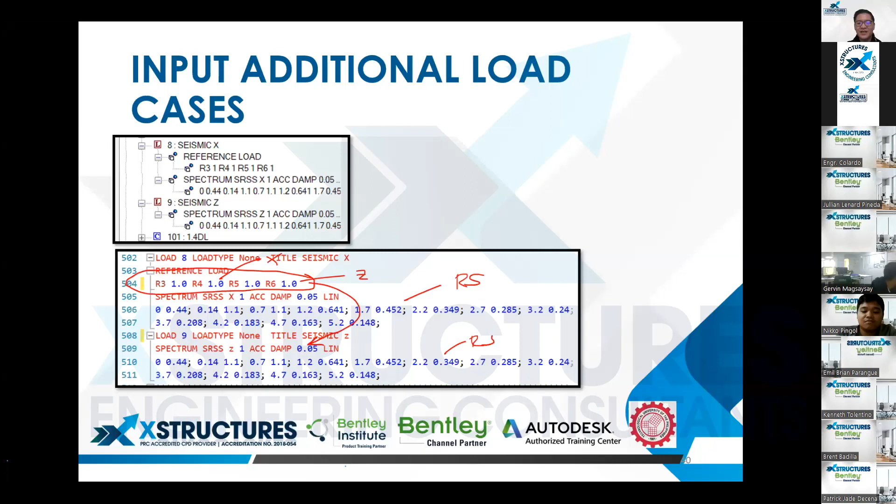Then according to the code, you need to compare the static base shear with the dynamic design base shear. If it's a regular structure, at least 90% is acceptable.

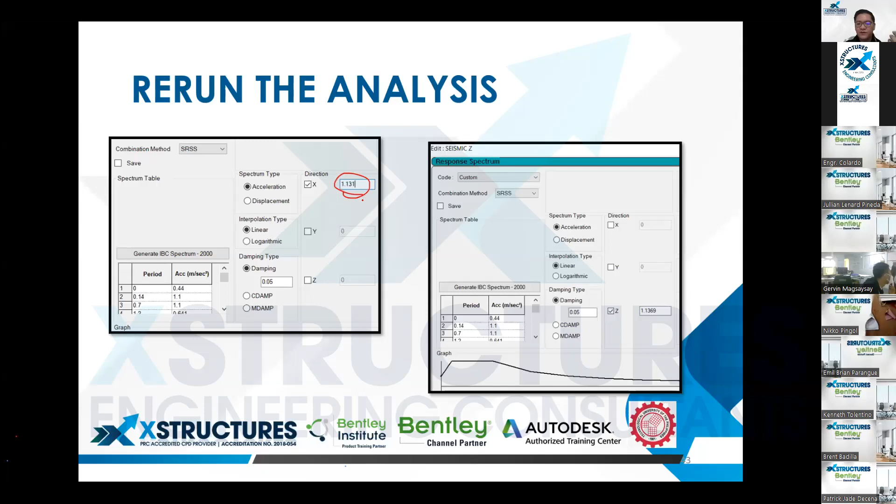In this case it's 1.13 for X and 1.14 for Z. Then you rerun the analysis again, and you'll see the values almost match now — 5.9 and 5.9.

That's it — you import that into the RCDC. So, thank you for listening.

Sakto — three. Okay, anyway, bonus na rin. Bonus hours to the end user.

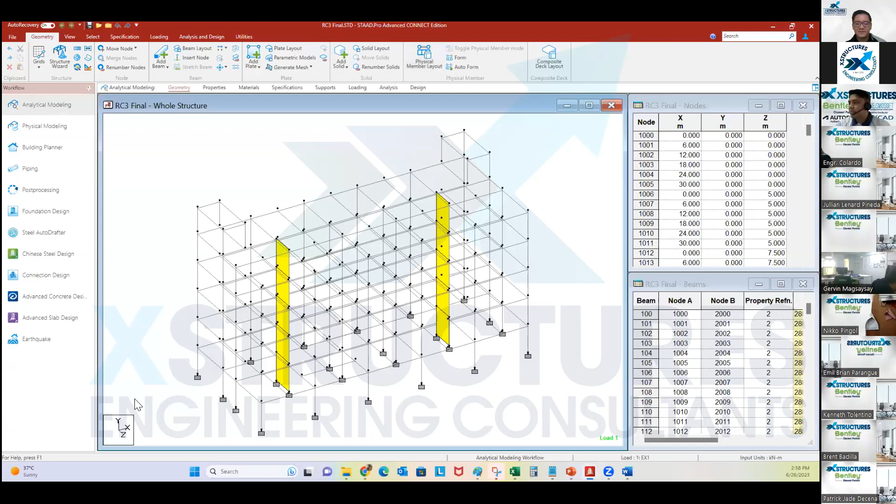Let me move this. Okay, actually I have three models here, and I'm also going to discuss the easier way, which is a new feature in the latest Staad Pro release, for creating the seismic mass.

Let me open this — okay, anyway, this is the final model. Let me show it to you.

So this is a 5-story structure with a shear wall, and then the primary load cases, and here we have the response spectrum load.

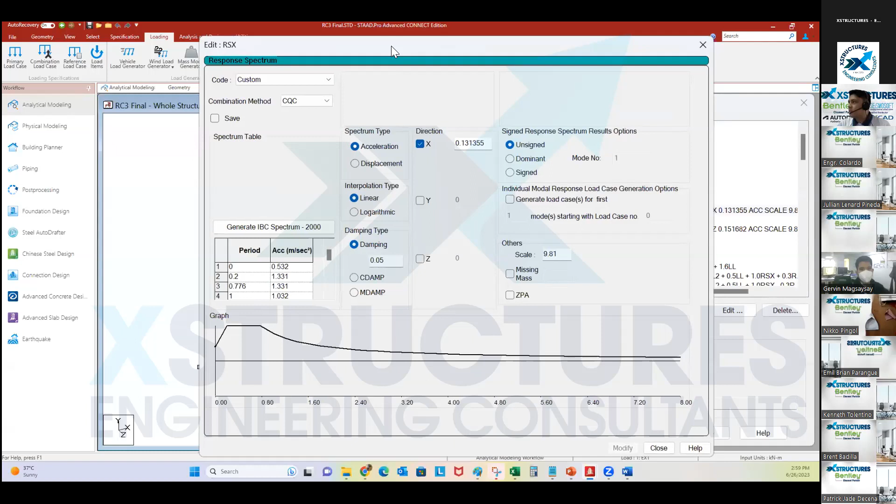Okay, so here I just pasted the period-acceleration pair from my Excel RS curve builder.

So it comes from here — whenever I change something here, the values automatically change, and it's as easy as copying and pasting these values into Staad Pro.

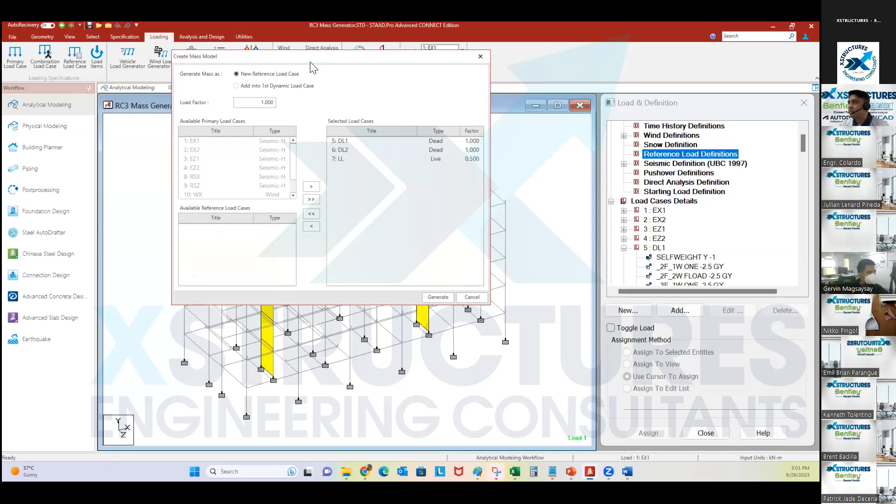So when I click this mass model generator, a dialog box appears, and by default these are the values — live load is set at 0.5.

Now it depends on your discretion whether you will include the live load, but for the purpose of this webinar, I'll set it to 25% live load.

So for the seismic mass, that's 100% dead load and 25% live load.

Notice what happens to the reference load here when I click generate. So when I click generate — there, okay.

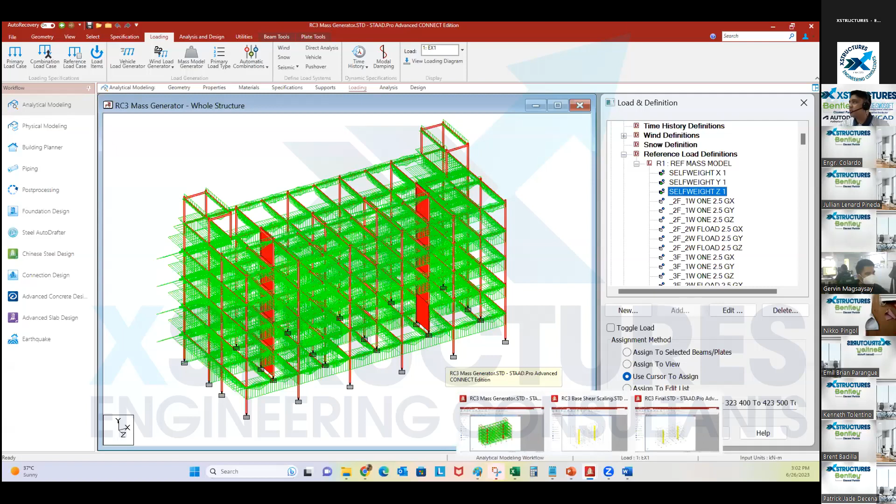And it's ready to analyze now, so I'll just go to Analysis and Design and click Run Analysis. Wait a second — save.

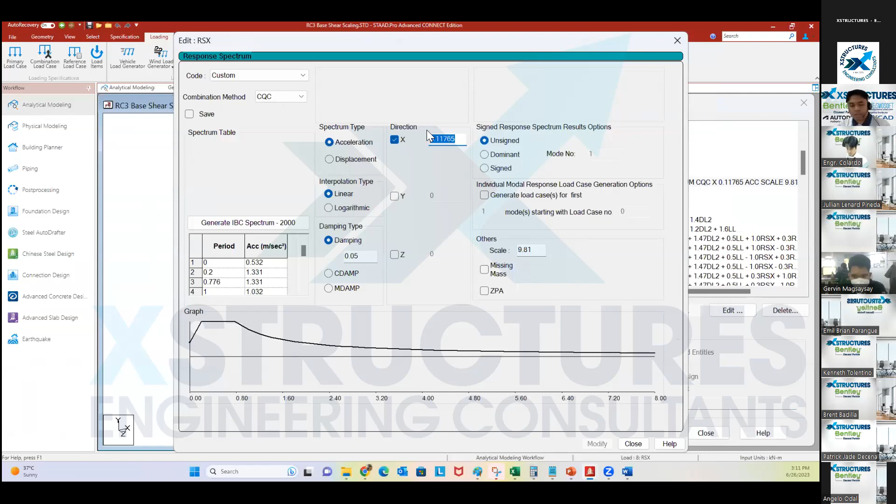Then sa other direction tayo, which is this one, edit, then paste natin dito. Okay, then click modify, and then click close, and then run na natin yung ating final analysis, no? Tingnan natin kung magma-match ba siya sa 90% static base shear. Okay, so click save.

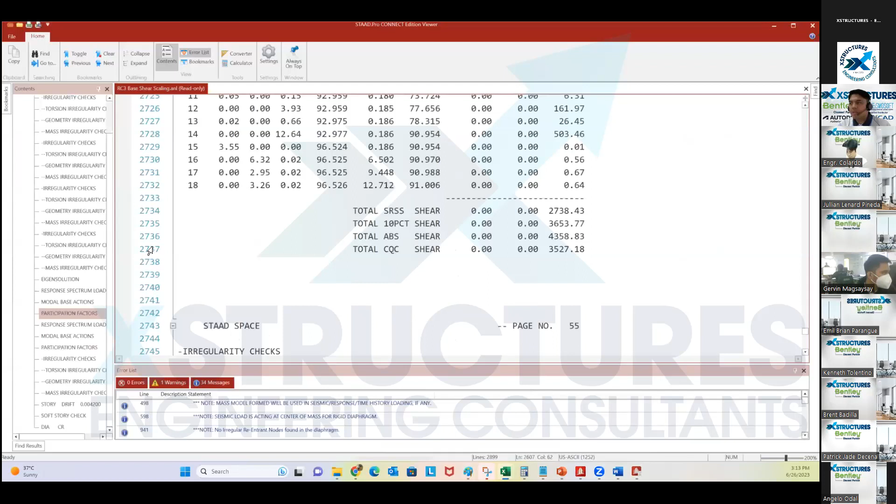And then on the other direction, so wait a second. Yeah, should be 3527 din, no? So sorry. Nasaan yung aking Excel? Okay. Excel, wala. Excel, yeah. So this should be actually both, no, both X and Z direction. So we should have this same value, no, 3527 then yeah, which is ito, no. Ayun, and then few discussion, no.

So after this like the demo, no, and response on base shear scaling, no. So may inad ako na command dito sa sa model, which is may torsional irregularity checks, no, so which is the program is able to perform, no. So and bibigyan kanya ng notification kung okay or not okay, no. So kaya lang before this webinar kasi na design na tong structure na to, no. So kaya ayan, okay naman siya with torsional irregularity check, no.

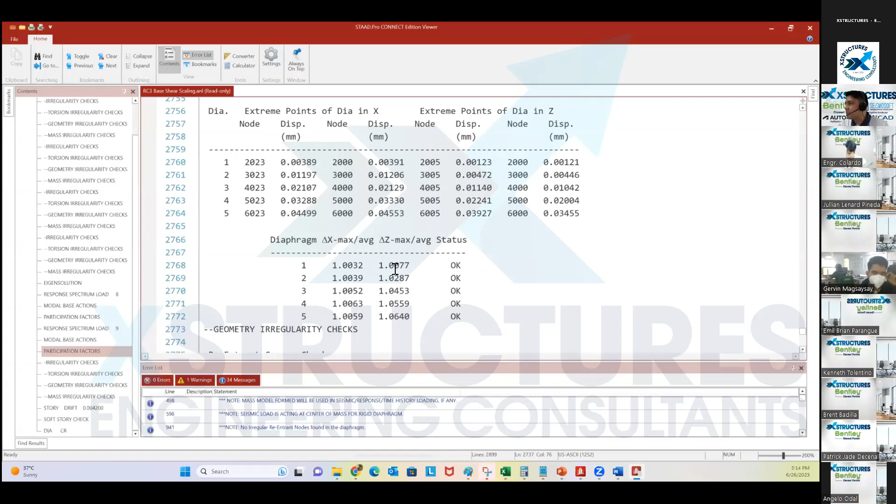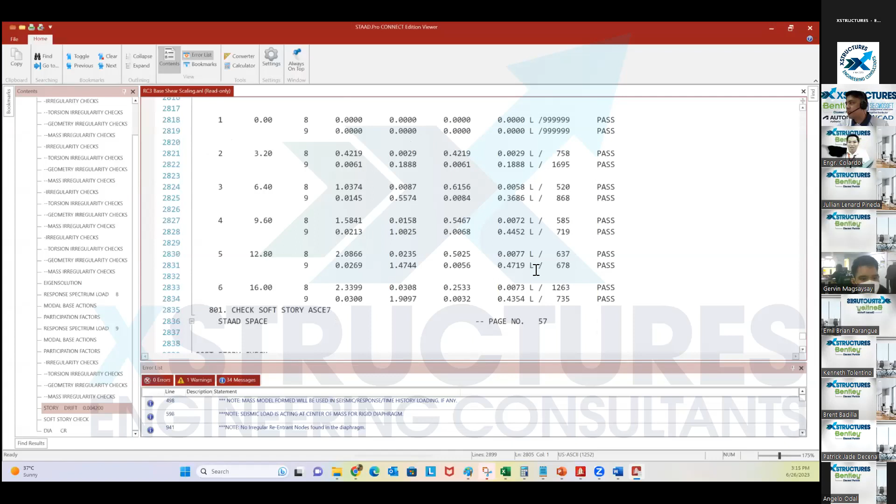It says okay, no, and checks ng reentrant corners, then mass irregularity check, no. Okay, and also I have added here drift check as well, no. Okay, may calculation tayo sa allowable elastic drift, then i-compare mo yeah, with the actual, but the program is able to perform that automatically, no, by putting the allowable drift, no. And then yun, so mag-output siya kung pass or fail, no. And then also soft story check, no. This structure is okay.

Yes po, yeah. So i-share yung model. Yes, yeah. Yeah, okay po. I-share namin yung final Staad model. Yan, yeah, that's it. Okay, so with that, no, so as easy as that, so yeah, so that's how you

perform yung like response spectrum analysis, and then load combo, no. Punta ko lang ito, may load combination na ba to? And yeah, so you're gonna replace yung static earthquake load, no, ng dynamic, no, so with that similar load combo. And then if you want to design kung ano yan, kung concrete or steel yan, no, so kung concrete RCDC, sa steel naman diretso na kay Staad Pro. Okay, so with that, yeah, that's for my application nung response spectrum analysis with Staad Pro.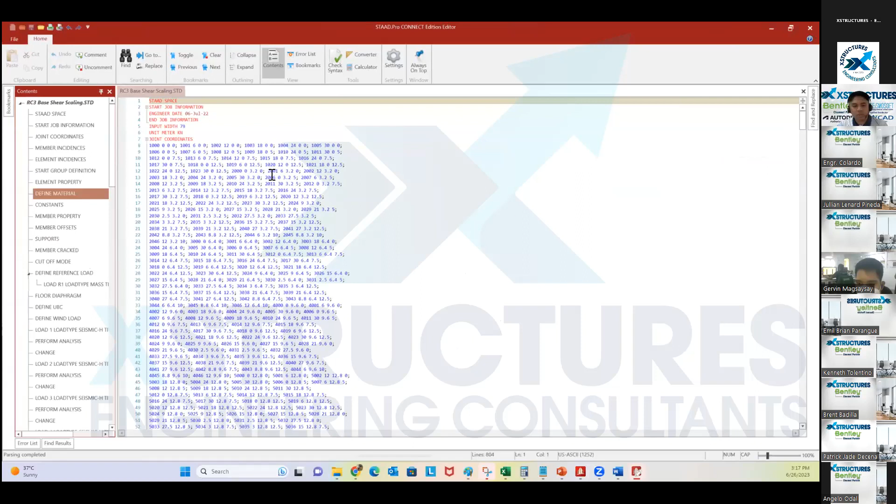So may question dito, no, ideal number of modes, yeah. So story times 3, no? Kaya ang ginamit ko kasi dito sa sa model na to ay I believe 18, no? So modes, control F, control F mode. Yeah, so I use 18 here, no? 18 number of modes. So 6 kasi almost 6 story, no, with the 5 story plus yung in-add ko yung like yung small structure pa, no, above the roof. So kaya nilagyan ko ng 18.

But when you review naman the output here, no, nag 90% naman siya, participation factor. Dito tayo sa modal base actions, ito participation factor, no, so nag 90% pa siya sa mode 4 pa lang, no. So mode 4. Yeah.

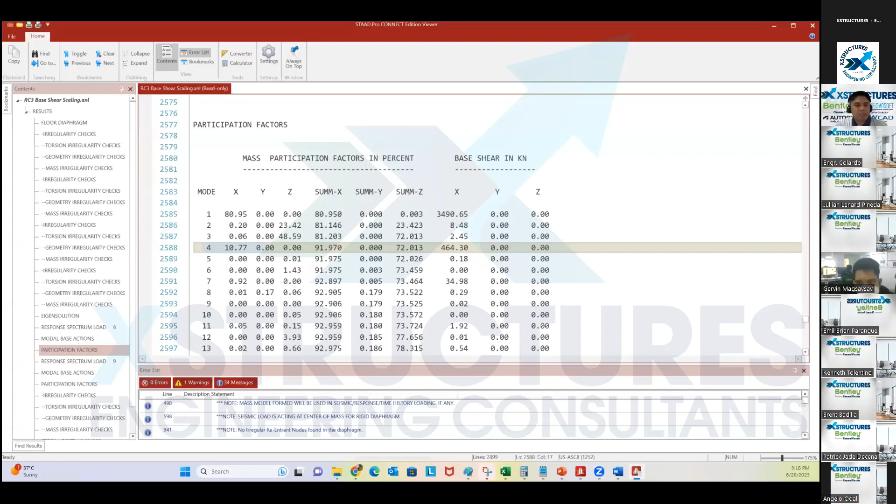In case of horizontal irregularities, the eccentricity is manually modified. Yes, may input. Yeah, may meron din dito eh. So edit, no. Then you can edit from here. So pwede mong kontrolin dito yung eccentricity, no, values.

Though, mas mataas yung ginamit na PGA sa bridge, no? Sir Pao, I think can answer better here. Yeah, na-answer na ni Sir Pao. Bridges are designed elastic, more on elastic response kasi yung nire-require natin sa bridge. Unlike sa building, ductile response talaga.

Sa response spectra, nakita nyo, let's say 1.1 G, no? Then ni-reduce natin yung base shear natin by introducing the R value. So sa bridge, mas maliit yung R value niya, kaya yung base shear natin mas malaki, kasi yung R value natin nasa denominator.

Orthogonal effect plus response spectrum ba yung magiging load combo? Yes, may orthogonal effects to. Dynamic load ito, then orthogonal effects, 100% and 30%.

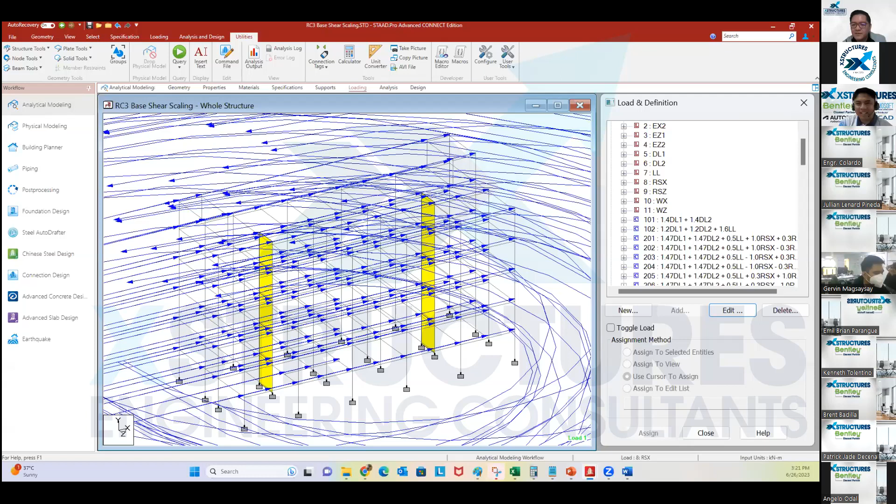Paano nakuha yung safety factor na 1.3 and 1.5? Ulitin ko lang, bale yung safety factor, galing dito, no? So ito ay nakuha natin from static analysis. Tapos ito naman from response spectrum na may initial scale na I over R. Then we're gonna use 90% base shear scaling, multiply ito ng 90%, so 3527. And then you're gonna divide the 90% dynamic base shear sa static base shear over dynamic base shear. Then makakakuha ka ng itong values na to, 1.11 and 1.28.

Kaya lang may initial scale na tayo na I over R, so binaba na natin ng I over R. So i-multiply mo tong dalawa na to, and then you get this final scale factor. So ito yung magiging input mo ngayon dito sa iyong response spectrum load. Ayan, so dito. Bali yung answer doon yon. Yung initial, bale ang answer diyan, 90% static base shear divide the dynamic base shear, then multiply by the I over R.

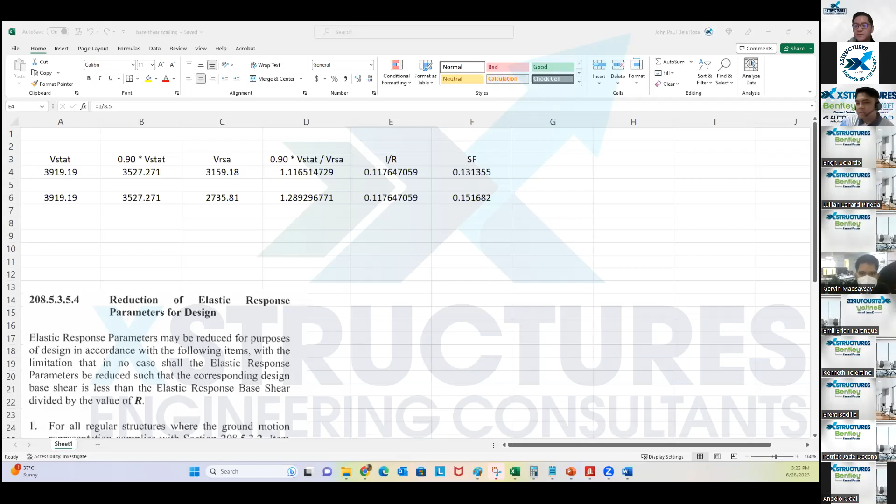Yung accidental torsion effects, ano yan? Pwede mong gawin to pag meron yan sa ASCE. Pag ASCE ang ginamit mo, I think meron yan. When I click add here, let's say, and response spectra, IBC, dito pwede mong lagyan. Pwede kang maglagay dito ng dynamic eccentricity, ganun din, gamitan mo ng IBC. So let's say i-delete mo to, and i-delete mo din to. Delete mo yan, then delete mo yan. Instead, gamitin mo tong mga to, okay, or you can have the value here. Sa IBC, yes, available yung dynamic eccentricity.

Sir, is there any input for zip code in IBC parameters na hindi mag-upload ng acceleration? Zip code sa US? Pag ang gamit mo ay IBC, i-type mo lang yung zip code. Hindi ko alam yung mga values nung zip code sa US. Pero pag tinype mo dito yung zip code, automatic nagge-generate yung curve dito. So I'm not just ready with that, kung ano man yung values dito.

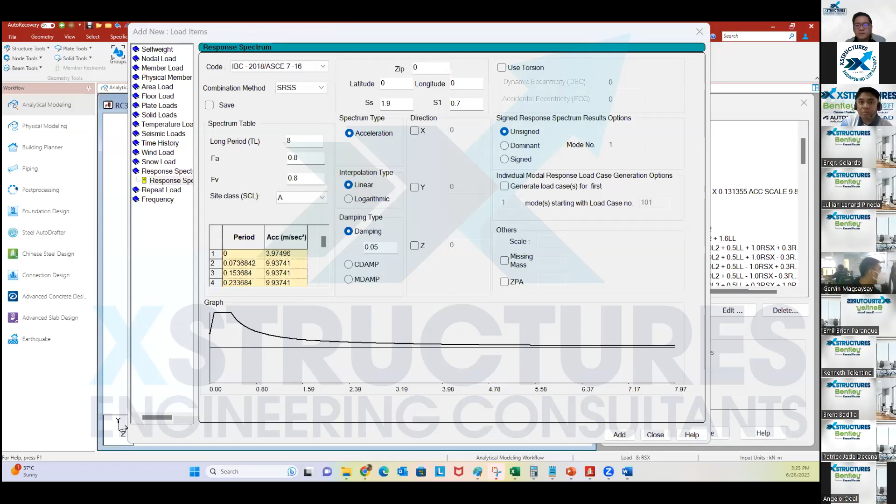May question dito, may option po ba sa Staad na mag-apply ng seismic force amplification factor sa specific element? Pag ganito, gawa ka ng special load combo. Kung gusto mo ng omega factor, gawa ka ng special load combo, magdagdag ka lang ng additional load combo. And then kung i-design mo yung elements na yun to RCDC, pwede mong inherit from the Staad Pro yung load combination papunta sa RCDC and design your element with that special load combo with the omega factor.